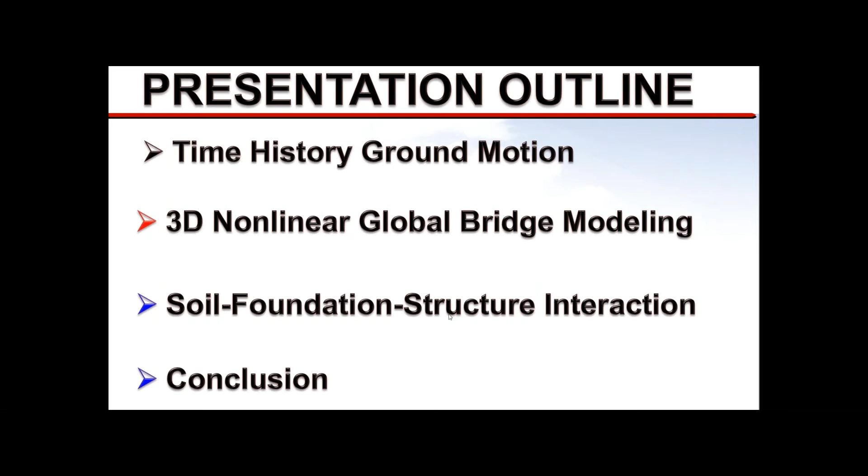So the outline of the presentation: time history ground motion, three-dimensional nonlinear global bridge modeling, soil foundation structure interaction, and then we come up with a conclusion. So what do you do when you have a typical structure versus a complex structure, and what do you need to do to develop the ground motions, and how many sets are required? Typically for complex structures, the community understands that we need about 11 sets of time history motions, and for standard structures, typically 7 sets of time history motions if required.

Keep that in mind. For typical standard ordinary bridges—2, 3, or 4 span bridges—we don't use time history, depending on the location and importance of the bridge. We use response spectra, but this presentation is all about time history and ground motion. Complex structures like Golden Gate, Vincent Thomas Bridge, and Samoa Bridge require time history analysis. Structures like MELOLAND (single 2-span, single column), Painter (2-span, 2 columns), and Brown Road Bridge typically use response spectrum, but we have recorded motion on these structures and want to examine what we learned and what we need to do for future structures.

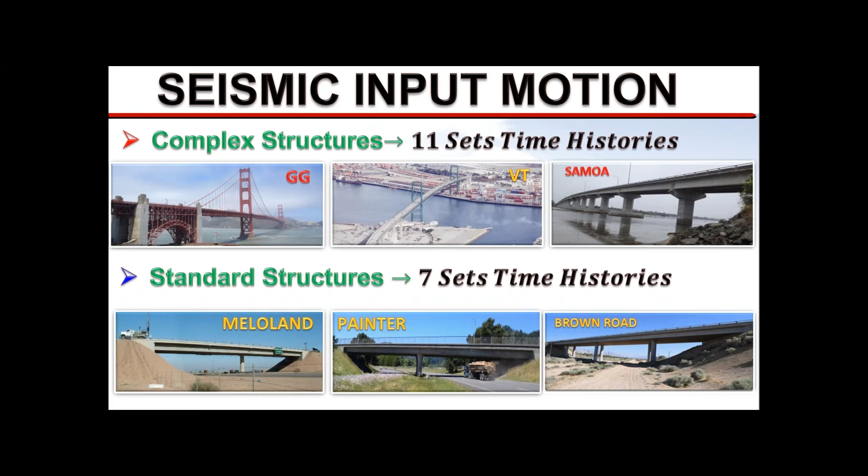So, ground motion parameters: as a structural engineer, you need to design structures that resist ground motion. You need to understand seismic source and attenuation relationship—not in detail, but understand the difference between shallow crustal earthquakes as far as seismic ground motion, intraplate earthquakes, and subduction zone earthquakes.

I don't expect structural engineers to be able to generate ground motion, but you need to understand the characteristics of these ground motions, because you're the one designing the structure and doing the analysis. It's important to see where the structure is located, because the ground motion you get from geotech, you want to understand if they delivered the right ground motion.

If you're in a subduction zone like Northern California, you don't want somebody to give you a ground motion from a shallow crustal earthquake. That's why it's important to understand the seismic source and what kind of attenuation relationship is used to develop this ground motion. If geotech gives you a ground motion whose attenuation is based on a shallow crustal earthquake for a structure in a subduction zone, as a structural engineer you need to ask why they're using the wrong relationship.

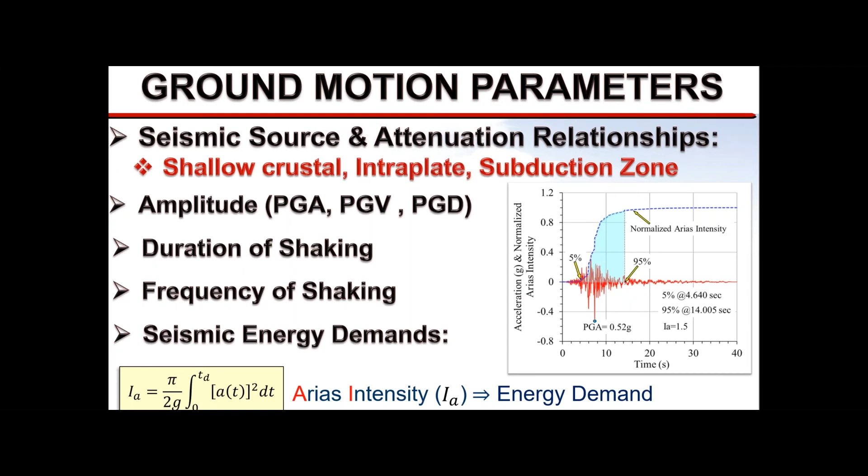Here is an example of a few ground motions. If I look at the Rinaldi motion from the 1994 Northridge earthquake, you get a PGA of 0.87. Duration of the motion is only 20 seconds, but it has a very high PGA. If you look at a motion from Northern California, the PGA is 0.51, the duration is 40 seconds, and it has a lot more cycles than the Rinaldi motion, even though Rinaldi has a big pulse—but the frequency content of the motion may not have as big an impact.

Look at the Saratoga motion, then look at the Chi Chi earthquake. PGA is only 0.37, but look at the velocity and displacement content and duration of that earthquake.

For Rinaldi, the PGV, peak ground velocity, is only 58. Saratoga is 16. Chi Chi is 103. If you look at displacement, Rinaldi is 16 inches, Saratoga is about 6.5 inches, and Chi Chi is almost 166 inches.

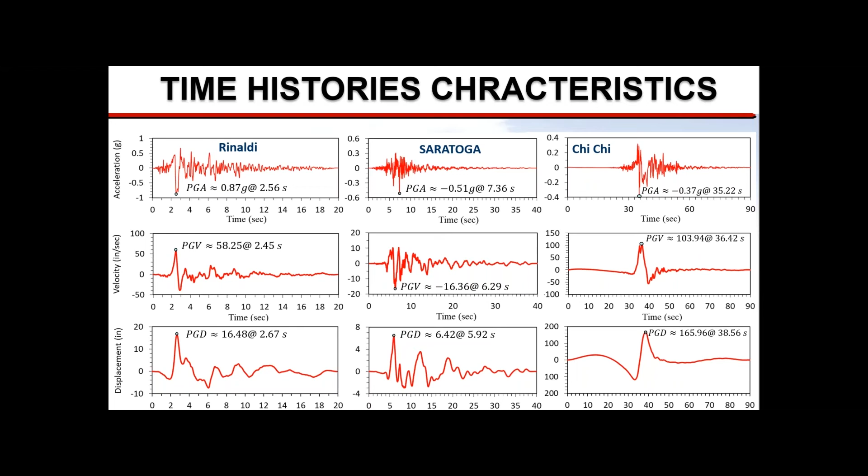When you do your modeling, you need to pay attention to the boundary condition of the bridge. For example, in this case we have restrainers supporting the bridge during the seismic event, and a rail sitting on top of the bridge. The bridge is supposed to support the rail, but it's also an important boundary condition on the bridge, so you need to consider all this when you develop your global model.

Another way, you may develop a detailed global model, but you want to make sure that your ground motions are correct.

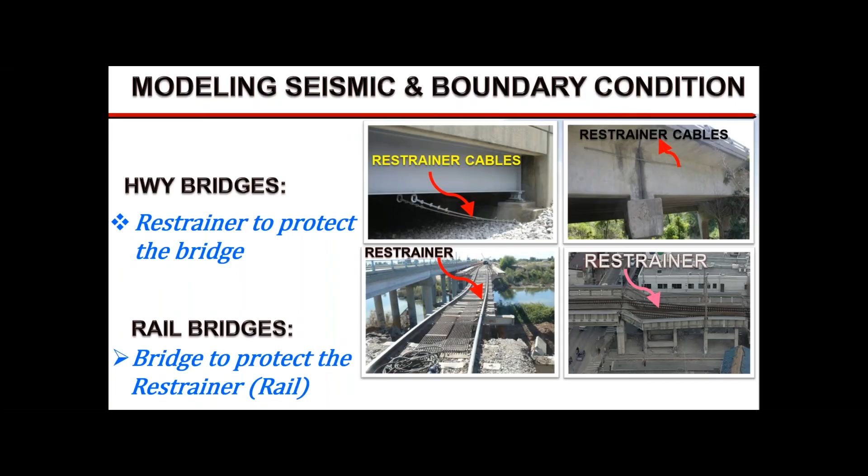When doing soil-structure interaction, that basically means a global system. You have an earthquake motion at the rock, you do your propagation, bring the motion to the foundation level, get a free field displacement, impose it on the foundation, and then get a response on the foundation. This response can be expressed in terms of velocity, shear, moment, and displacement as a function of time.

When you have, for example, 7 or 11 sets of motion, you have to look at all these time histories for all these responses and come up with some kind of average or make a judgment on how you should design the structure. The structure could be supporting either rail or just regular traffic, but the seismic analysis approach is still the same.

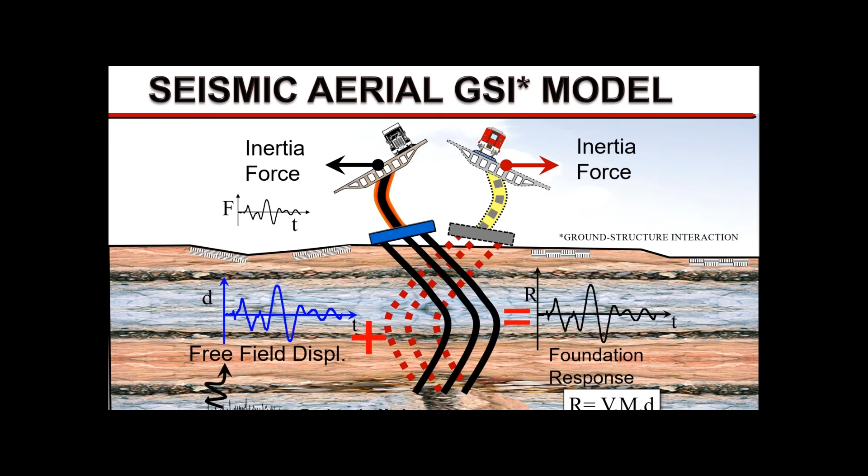This slide shows not only the global model for a typical highway, but also, if you have a rail on the structure, what is it that you need to do?

Basically, you need to develop your nonlinear soil springs, and depending on complexity of the structure, you come up with a ground motion, and then you need to consider what the rail on top of the structure is doing to the structure. Obviously, foundation springs and abutment springs are key.

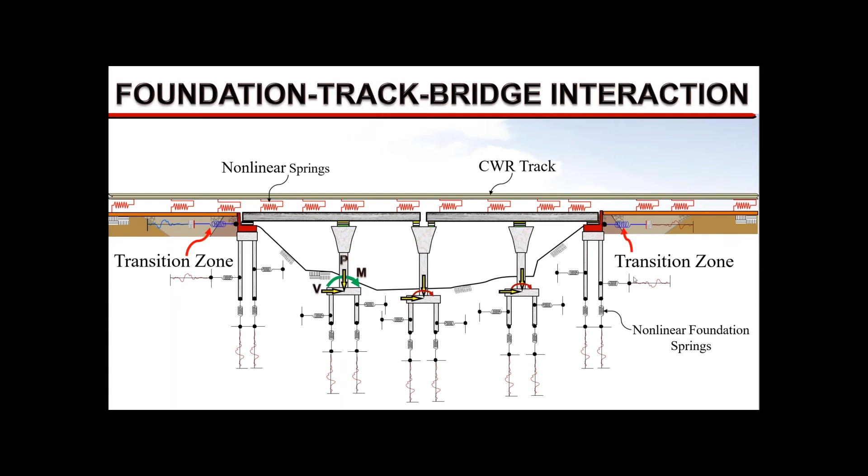We have a transition zone that will give you the nonlinear springs, and we've done testing showing how these nonlinear springs develop. They're very important in seismic analysis, especially if your bridge is not too long — the boundary condition from the abutment plays a significant role in the response of the bridge. And then, of course, there's the question of what kind of motion you'll be using, which we discussed earlier.

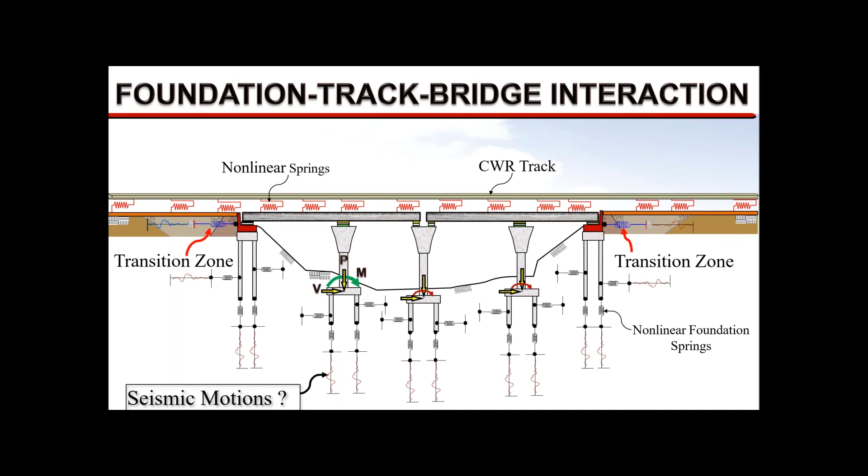We've done a lot of testing at various universities. We did a test in Utah, testing the transition zone for high-speed rail and also for high embankment. Here is the test setup.

With no backfill, this is the abutment. These are strain gauges to measure the pressure. This is the backfill with the compaction in place, and this is the system pushing the backfill.

This is a typical highway seat abutment, and you can see the back wall is designed to break during the seismic event as the actuator pushes into the abutment. This is looking at the abutment backfill after it's been pushed — you can see how the soil heaved, and we developed multiple cracks as a function of the push into the abutment.

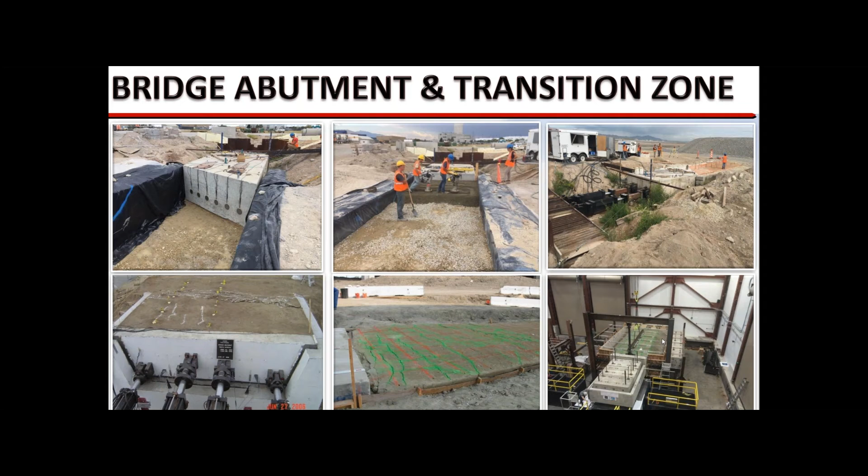These are all static tests using an actuator, but we've also done a dynamic test at the University of Nevada, Reno, with Dr. Saiidi — this is a dynamic test for the abutment. Here is the video of the test.

As a result of all this, we looked at all these tests and came up with abutment backbone curves and equations. I'm just showing the highway test for the highway backfill — this test was done at UCLA.

One was, and the rest of them were done at Brigham Young University in Utah. Once we plotted all the test data, we developed our hyperbolic model to come up with the equation to predict

the nonlinear backbone curve based on experimental data and also analytical model. So we have a good model for predicting this nonlinear backbone curve, which is extremely important in developing boundary conditions for the bridge. The test and analytical results show that if you have a nonlinear backbone curve for a zero skew, and you multiply that by a reduction factor R as a function of skew, it would basically be an exponential function

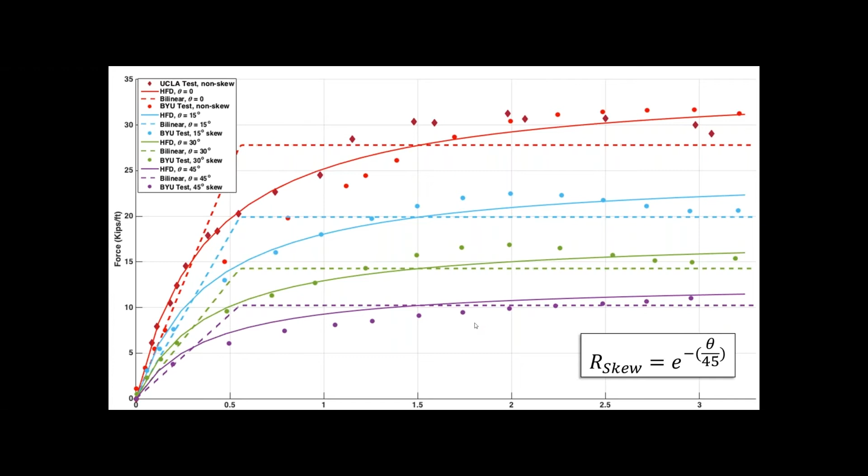We have published ASCE journal papers. If you're interested, just look at the abutment ASCE journal paper. You'll see my name and other co-authors, and you can look at the papers.

So, summary of the equation—very simple. Basically your force function, in terms of the hyperbolic model, has two constants, C and D, and they are easy to calculate. The values are given, and this is a simple equation for how we calculate the ultimate value, which is this point.

And you calculate the average stiffness, which we call K50—these are the equations. Very simple; you can do this in a spreadsheet in about 5 minutes. You can develop the nonlinear backbone curve based on these simple equations.

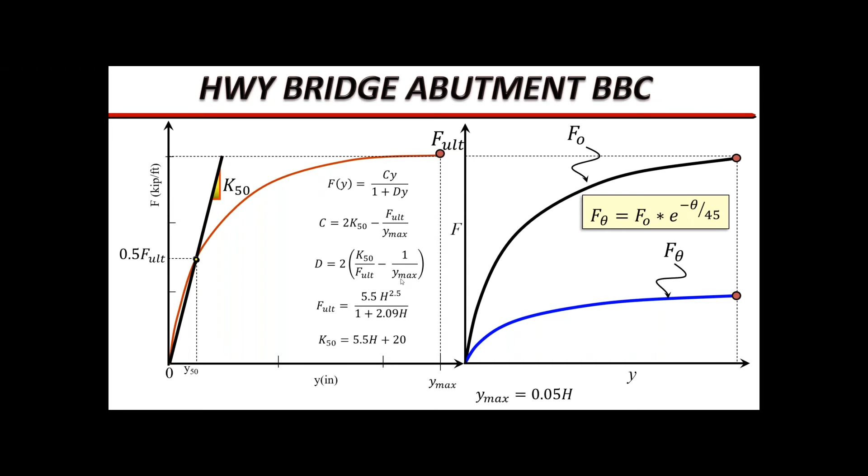This is just like the P-Y curves we have from LPILE and others—just another P-Y curve, but for the backwall. If you look at the new SDC, these are the equations in SDC 2.0.

They're based on all the tests we have done and the analytical model I've shown you. So the F-ultimate would be the simple equation, and if you multiply that by the R reduction factor, it gives you F-theta, the skew angle version. Very simple—there's no magic.

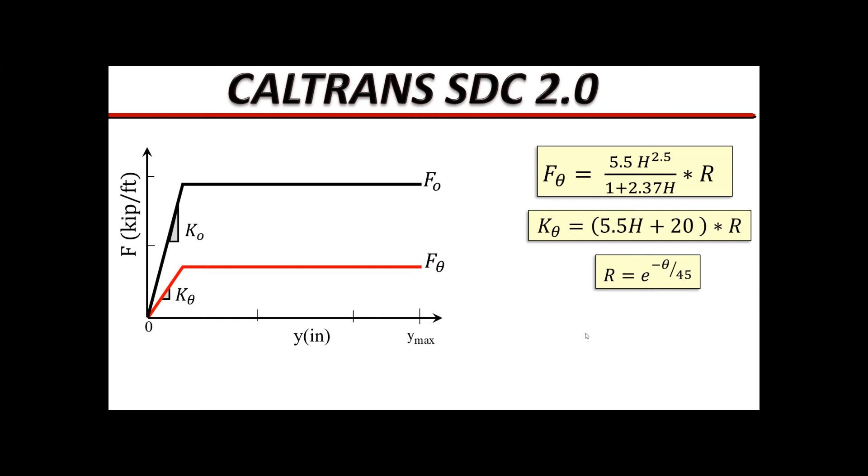So here is an example of the time history analysis with the rail sitting on top of the bridge, using time history. You can see the complete model—by the way, these are what we call direct models. There are two types of models when you do analysis: one is the substructure model, where you get rid of your foundation using a 6x6 stiffness matrix. These are old—we don't do that anymore. Almost everybody I know these days is interested in doing detailed seismic analysis using a direct model, meaning your foundation, pile cap, and everything, including the superstructure, should be included in your global model.

So you specify your nonlinear spring at the foundation, you impose the motion, and basically get your result.

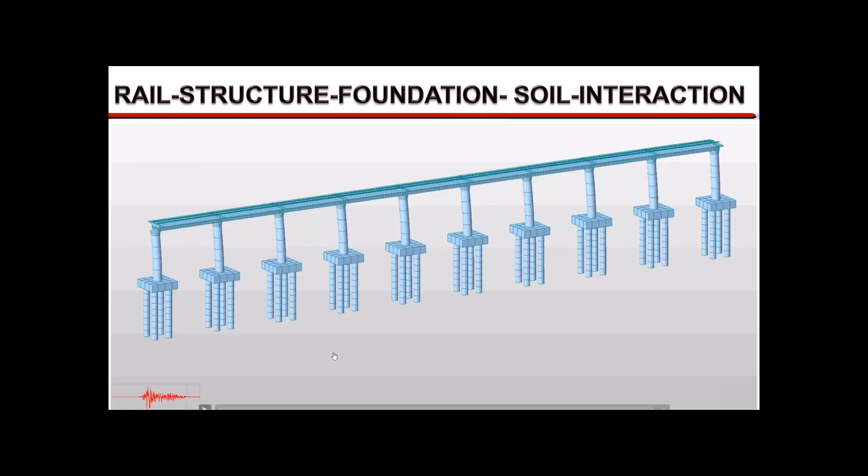So what do we do when you have a complex structure? Depending on what organization or criteria you look at, you can use either 11 or 7 sets of time histories. So what do you do if you have a fault rupture?

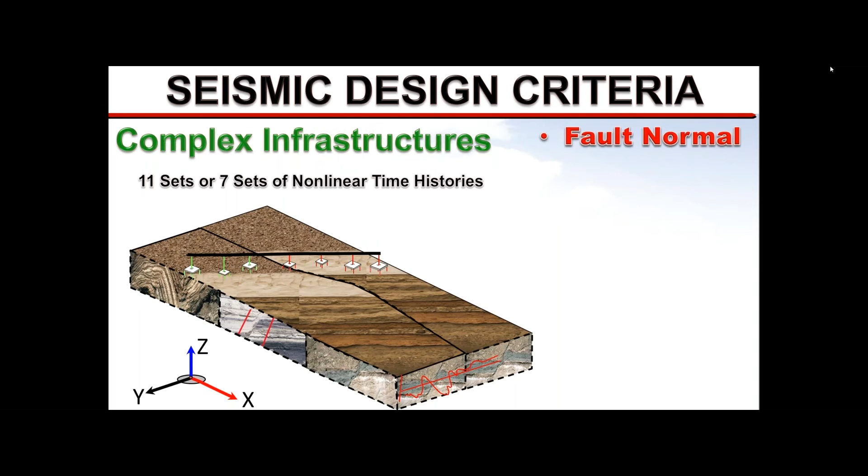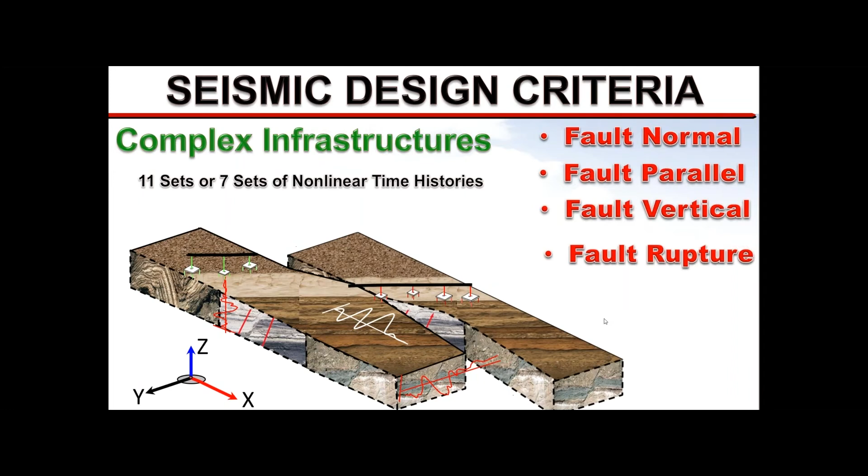Even if you don't have a fault rupture, you need to look at three-component motion: fault normal, which is this motion right here, fault parallel, and fault vertical motion. You also need to look at the fault rupture, and in particular, if you have a rail, it becomes very important that you look at fault rupture as well.

So when you do these time histories, you need to look at the uncertainty in the fault location, and also the fault rupture mitigation—what is it you need to do for mitigation? You can use isolation or other techniques, which we won't discuss here since this is mainly about time histories.

But if you have a fault rupture, what do you need to know? As you know, the rupture is not a single line, it's a zone you need to examine. So you want to make sure you place the fault at different locations along the structure and analyze it bent by bent to see what gives the worst scenario.

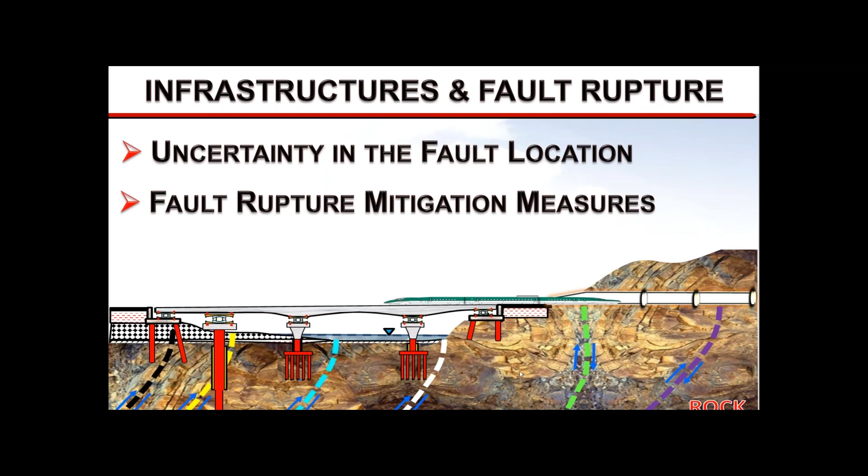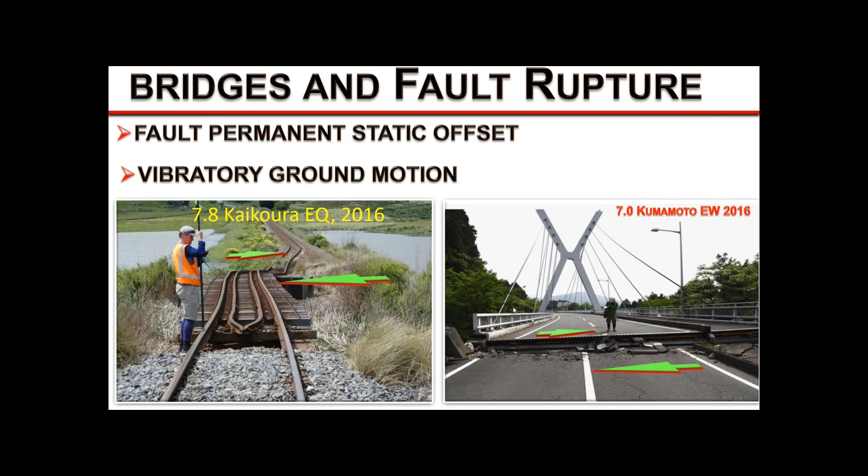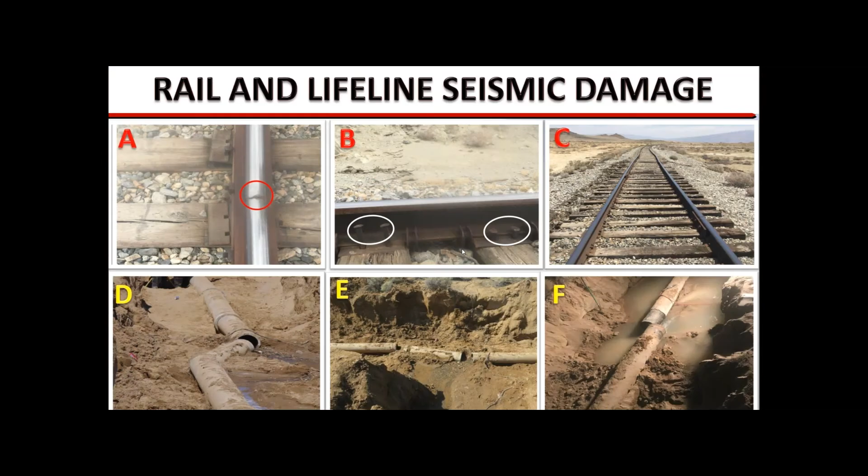There are other details, these are all from the Ridgecrest earthquake. You can see again what fault rupture has done to the rail. Spikes coming out, of course the movement, and also other underground structures, breaking pipelines, water lines, gas lines.

So when you look at fault rupture, or when you want to do earthquake analysis, if you have a fault rupture, you want to make sure that if the rupture is in the vicinity of your project, you need to look at the fault rupture issues too and impose fault rupture into your time history analysis.

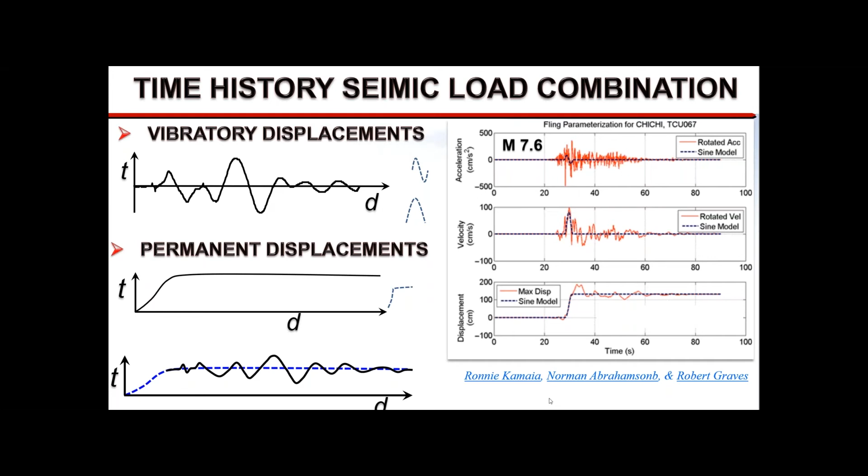This is the established procedure that has been used on various projects. I'm not going to name any particular project or any criteria for any particular project, but this has already been implemented in a couple of projects that I was involved with.

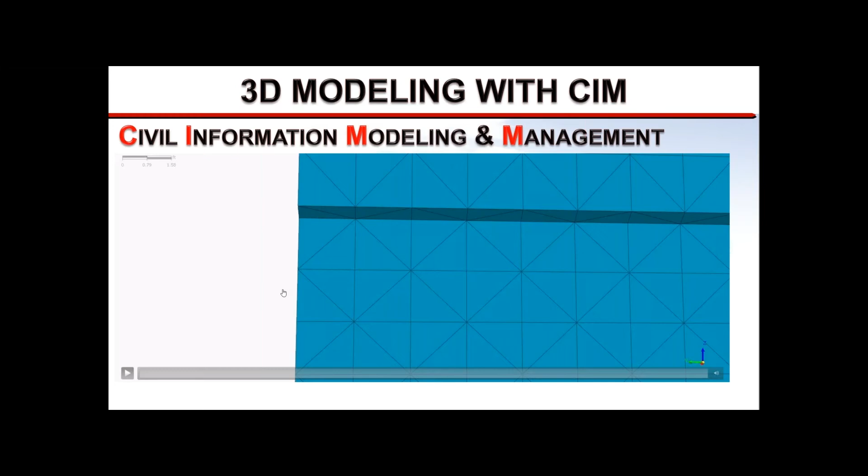But now developing a global model these days is not an issue. There are new techniques now with this computer age that we can develop very sophisticated computer models and look at things in detail. This is an example of what we call CIM, which is Civil Information Modeling and Management. This is done actually through MIDAS. It's an independent software, it doesn't depend on AutoCAD or MicroStation. It's a software that is developed by MIDAS.

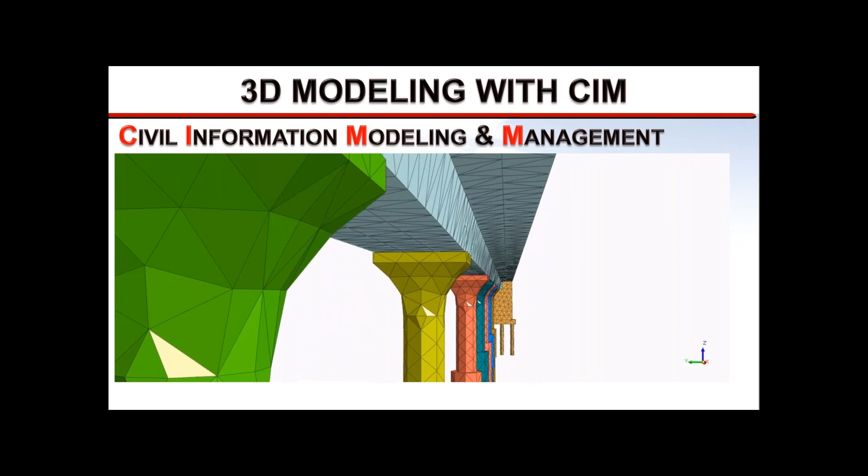And you can take a set of bridge plans, and with this set of bridge plans, you can develop your full 3D bridge model. And it could be even a continuum model, not really like a beam spring model, but a continuum model that shows also all the rails and everything, as you can see, on the bridge with isolation casing and so forth. So all of this can be included in your model.

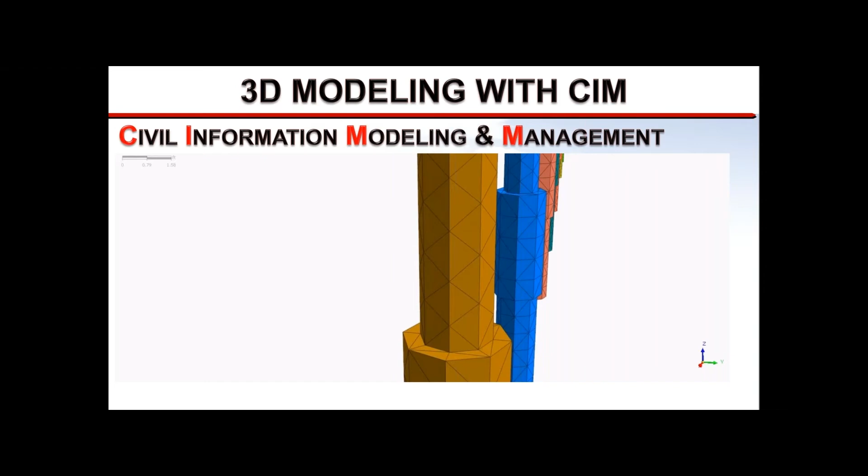And here is an example of that model. So with this model, I'm trying to show the fault rupture. I'm assuming they have a fault rupture located at this bent, in between this bent and this bent. You can see these are all supported on type 2 shaft with isolation casing, and this portion of the foundation is supported on pile group.

So the structure could be a combination, depending on the structure location. If it's running, for example, across the river, you may want to have a combination of shaft and pile group. In this case, this is a combination of shaft and pile group, and we want to see what happened to it as we impose the fault rupture.

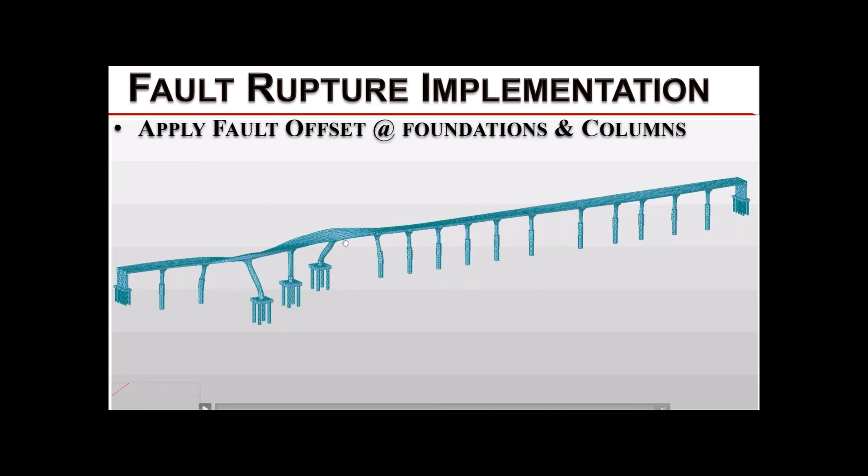So if I impose a fault rupture and vibratory ground motion, you can see I have a ramp function here with my history that is basically pushing into the bent in one direction and pulling in another direction. And that's what happened, and you can see how the superstructure is actually twisting. This is a closer shot. So I have the vibratory ground motion and a fault rupture imposed at this bent and this bent.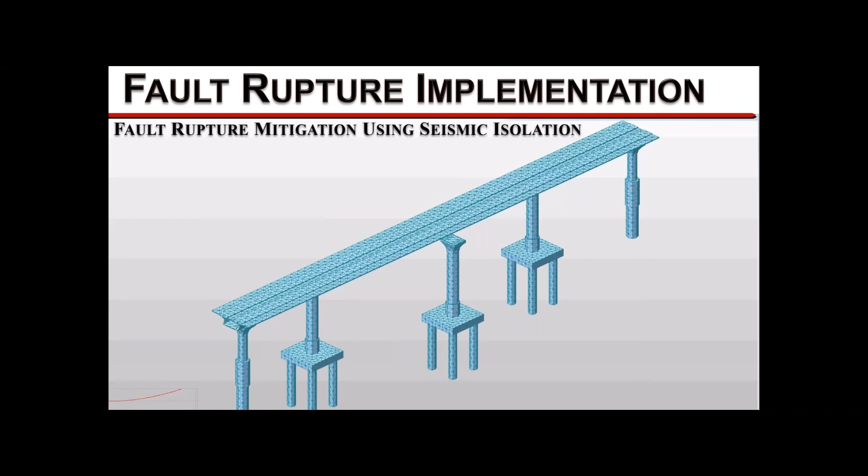So far I talked about general ground motion and what it is that you, as a structural engineer, need to consider. How do we know what we're saying or what we've done is correct, or that we can make sense out of it? So we looked at many instrumented bridges, including complex structures, just like I showed here.

This is a Caltrans bridge located in Northern California, the Eureka Samoa Bridge. The bridge is 2,065 feet long, 34 feet is the width of the bridge. It was constructed in 1968 and retrofitted in 2002. The recorded motion we will show you for the analysis is based on after the retrofit was completed.

So here, I'm going to start with the simple instrumented bridge and see how we were able to model this bridge and develop a response that matches the recorded motion.

Two bridges that we looked at are Meloland and Painter Street. These are the seismic instrumentation points. We have done extensive testing on the bridge, including the abutment test. We drilled behind the abutment in order to capture the properties of the abutment and see how we develop nonlinear backbone curves for the abutment, because abutments play a significant role on this type of structure.

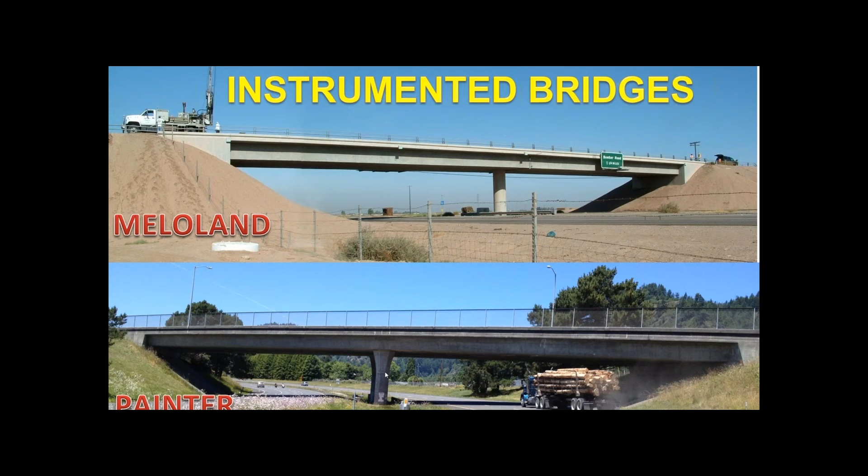We've done ambient vibration tests on these bridges. I'm just going to show you one of them, Meloland. Here is one of the ambient vibration tests, done by University of British Columbia, and I was there when they did it. Here is the recorded ambient vibration result, and here is a MIDAS model including all the foundations using a direct model. Here is another twisting ambient vibration, and here is a MIDAS model.

Before we started developing these time history models, we wanted to make sure our model is calibrated against this ambient vibration, so we get a good sense of the periodicity of these structures.

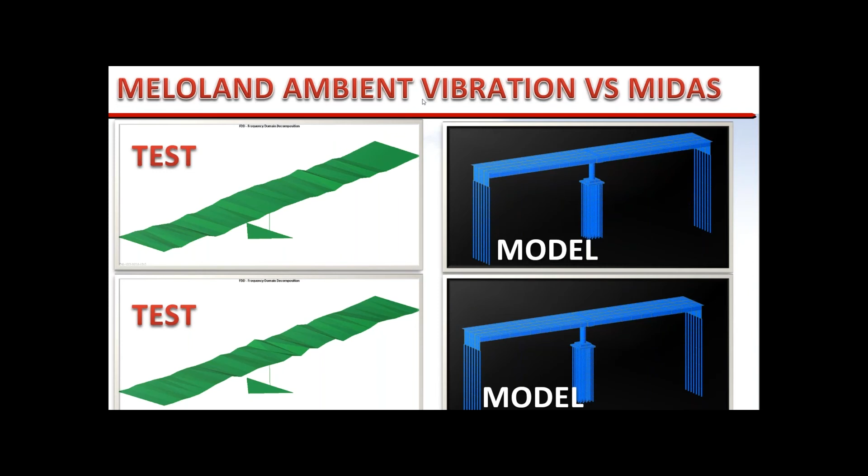If you look at Meloland, I'm just showing one of the instrumentation results here, basically channel 9, recorded versus calculated motion. They run on top of one another right here. Again, because we had a very good model of the abutments, we were able to capture the response of the bridge. Also, the pile cap springs played a significant role.

One thing about these pile caps: a lot of engineers ignore the contribution of the pile cap. Honestly, when looking at these instrumented bridges, including the Samoa Bridge, where the pile caps were sticking up above the mud line above the water surface, the mass of the pile cap was very important in matching the recorded data versus the calculated data.

For Meloland and Painter Street, not only the mass of the pile cap, but also the nonlinear spring attached to the pile cap were also very important in capturing the response of the bridge compared to the recorded data.

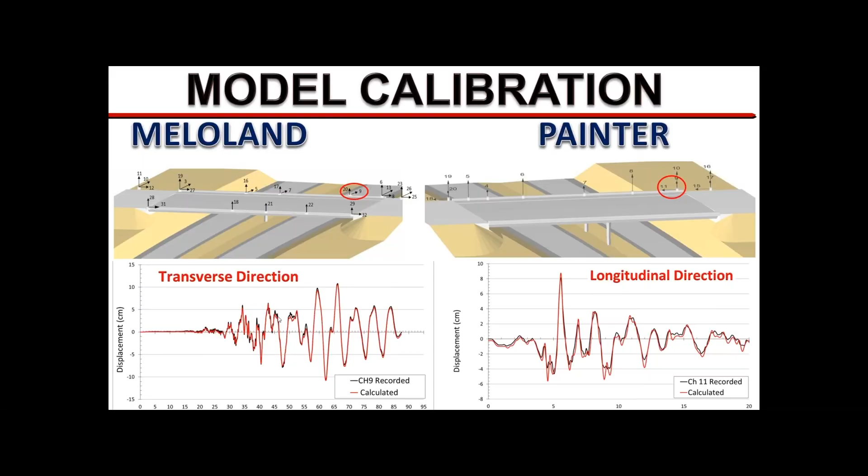So here is the Samoa Bridge. I'm looking at channel 10 and channel 8. Channel 8 is recorded at the bottom of the column, channel 10 at the top of the column, and we're looking at these in the transverse direction, which are key, very important in seismic analysis.

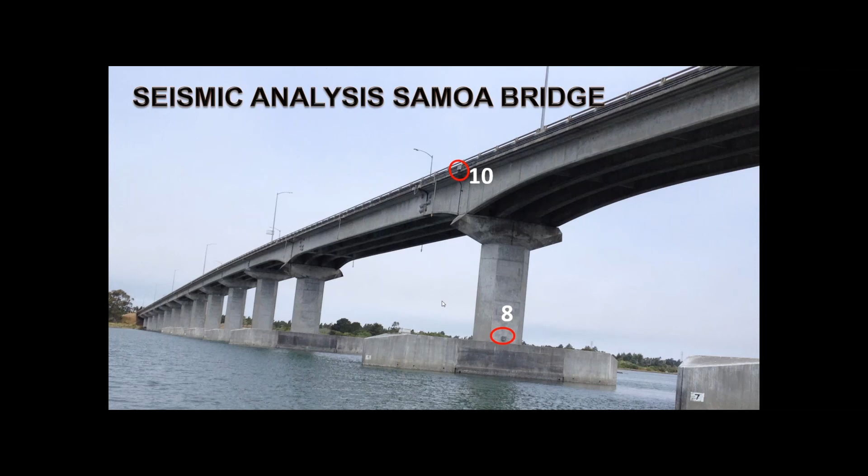Here is the detail of the model. So we impose nonlinear springs, and honestly I did not play with this nonlinear spring at all. I just looked at the soil profile. There isn't enough time for me to show the soil profile, but we just looked at it, developed nonlinear springs just like we do for typical bridges, attached them to the piles, and imposed nonlinear time history motions.

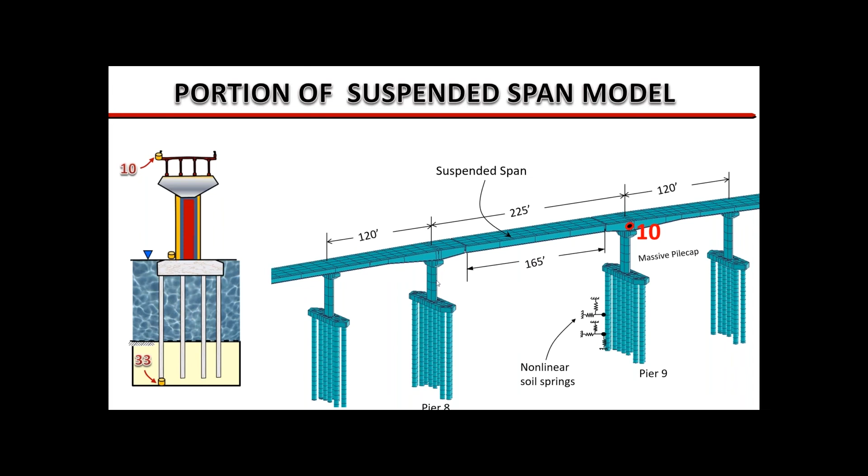The mass of the pile cap was very important in capturing this response, and also assigning cracked moment of inertia to the columns was also important.

Here is the response of the bridge. I'm just showing channel 10 in a transverse direction. This is the displacement time history, recorded versus calculated. If you look at two peaks, the period of peak to peak is about 1.48 seconds.

That matches the period of the structure in a transverse direction, shown here as the mode shape with a period of about 1.48 seconds, let's call it 1.5 seconds. That becomes important when looking at the Ridgecrest ground motion, as I'll show later, if we excite this bridge with the Ridgecrest earthquake, what would have happened rather than with the recorded motion from the site.

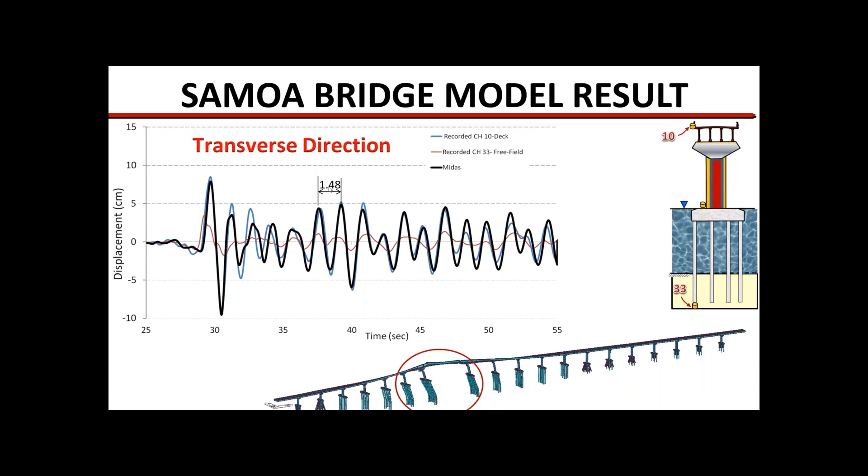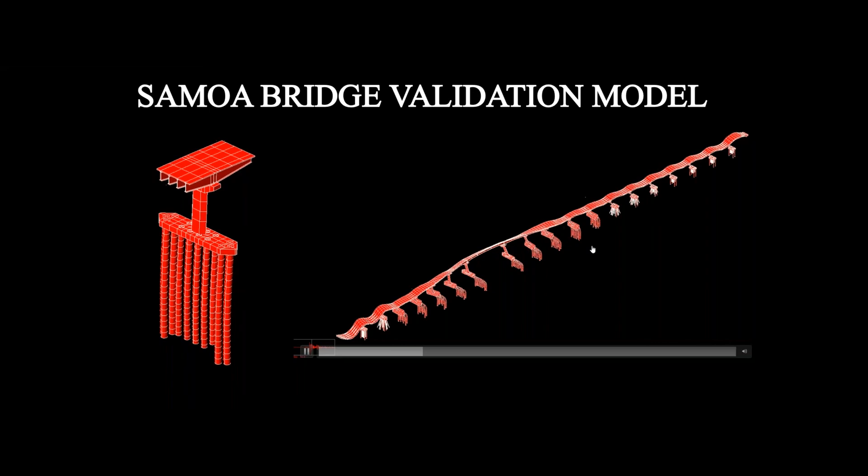So here is the animation of the bridge using the time history, and this one is just looking at one of the piers. This one.

So far we talked about bridge instrumentation and what we did to calibrate our recorded data versus our analytical model. We didn't use any continuum model. The models are not really sophisticated, just beam spring models, and I really think this beam spring model is the best to model bridges, because we know what to do, we understand them, and we've worked with this for many years. So my recommendation, based on my own experience, is that beam spring model is the best to go, with direct modeling.

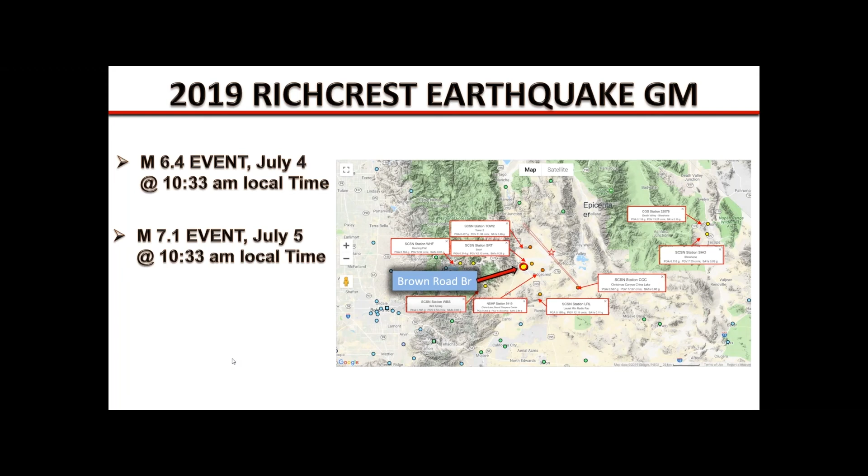I don't do substructure modeling, where you break the structure into superstructure and model the foundation separately. These days it's easy to do a direct model instead. Actually, I think it's a lot easier than doing a substructure model, because with substructure modeling you have to build the foundation model separately, analyze it, then come back and check if it works. With the direct model, your foundation is already included. If you need to do a pushover analysis or whatever else, you already have everything in your model, you just separate it and go.

So let's talk about what we learned from the Ridgecrest earthquake, and what we need to do based on that in regard to ground motions.

Here is an instrumented bridge, showing the instrumentation. We looked at instrument number 7 and number 4 in the transverse direction. The bridge is located about 14 miles west of the main rupture, magnitude 7.1. There were two earthquakes, magnitude 6.4 and 7.1, but we're only looking at the magnitude 7.1.

In particular, I looked at this recorded motion on Brown Road Bridge, and also imposed another motion with very high directivity, located at the end of the fault, to see what would have happened to the bridge if it had been located there with high directivity, rather than 14 miles west of the fault.

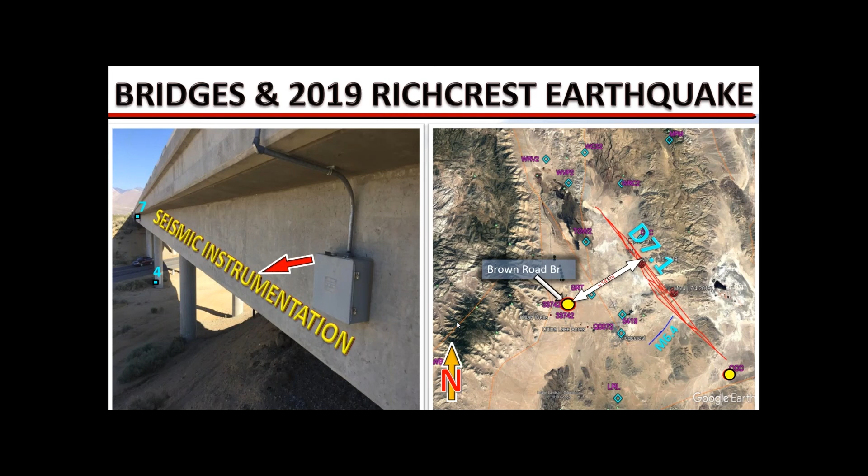So here is a little more detail of the bridge. In order to understand its behavior, we wanted to look at some details. Channel 7 and channel 4 are located at bent number 3. Bent number 3 is fixed to the pile foundation, while bent number 2 and bent number 4 are pinned. As I'll show you later, you can see this bridge.

If I had looked at this bridge before—this is just my personal opinion, not saying what should have been done—but if I'd looked at it as part of a screening, I would have thought it should have been retrofitted. But interestingly, nothing happened to the bridge during this magnitude 7.1 earthquake. Nothing happened. Why? We'll look at it. It also has a 45 degree skew.

And it was constructed in 1966. At that time, I'm not even sure if seismic loading was considered or not. I'm not sure.

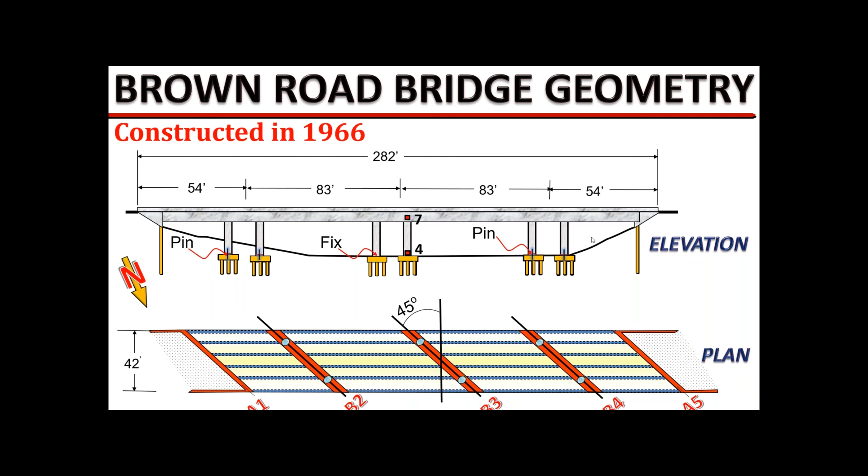Here is more detail of the bridge. 42 feet is the width. As I said, bent number 3 is fixed to the pile cap and foundation—this is just a schematic. Bent number 2 and 4 are pin connections. You can see the detail for the columns, number 11 bars, total of 24, but only number 4 spiral with 12 inch pitch, so I would have thought this should probably have been retrofitted.

Also, here is the detail of the foundation piles, 18-inch diameter foundation piles, number 6 bars, total of 4, again with minimal confinement.

Here is the detail of the pile, column sitting on the pile cap. Pin connection with 4 number 11 dowels extending from the pile cap into the column.

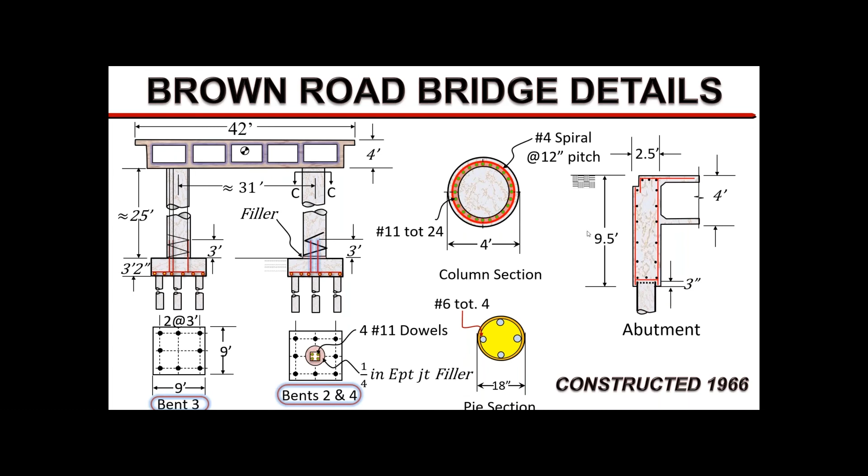Abutment, very important. It's a monolithic abutment. 9.5 feet is the height of the abutment. Therefore, you will get a lot of capacity, a lot of resistance from the passive pressure from this abutment. That's why we've done a lot of testing to make sure we understand the behavior of all these abutments.

So here is recorded motion, free field, channel 4, and channel 7. Free field means somewhere located in the ground, a motion which has nothing to do with the structure. Then we have recorded motion at the top of the pile cap, or bottom of the column, and recorded motion at the top of the bridge.

My God, they're all on top of one another. That's why when the team of CALTRANS earthquake engineering looked at the bridge, nothing happened to the bridge. Why? With this...

7.1 magnitude earthquake. If you look at the initial part of the time history, maybe 15 to about 25 seconds, you can see something happening - the red is for bridge deck response. You can see something happening at the early stage of the earthquake. These are very high frequency motions.

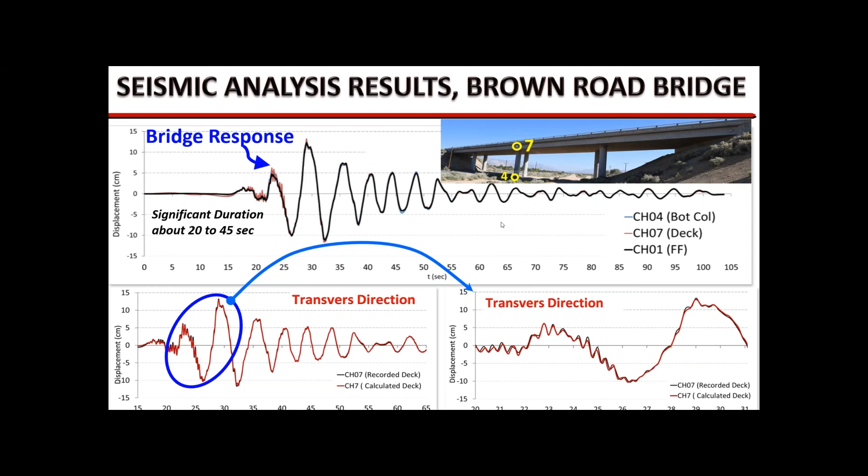That's what happened. So when I looked at this, I decided, well, why don't we shake this with a different motion and see what happens. What if I shake this bridge with the motion right here? This is one of the strongest motions, with very high directivity and large pulse.

So when we look at this motion, actually this matches the recorded motion - the calculated motion versus the input motion are exactly the same. Very, very minor differences, but almost identical, again because this is a very high period motion. Therefore, it's not doing anything to them.

So that's what I'm trying to say. You need to understand what motion is given to you by geotechnical engineers or engineering seismologists. You need to communicate with them and make sure they understand some portion of the structure behavior, or you want to make sure you understand what excites your structure.

So in this case, honestly, if I wanted to design a bridge in this zone, and I didn't have this ground motion, I would say I want to use this motion to design my bridge. But this motion is not doing anything to a particular bridge I may want to design. If I'm designing short span, typical standard ordinary bridges, this motion isn't doing anything to the bridge - unless you use some kind of response spectra from this motion and come up with a smooth response spectra, designing using response spectra, not time history analysis.

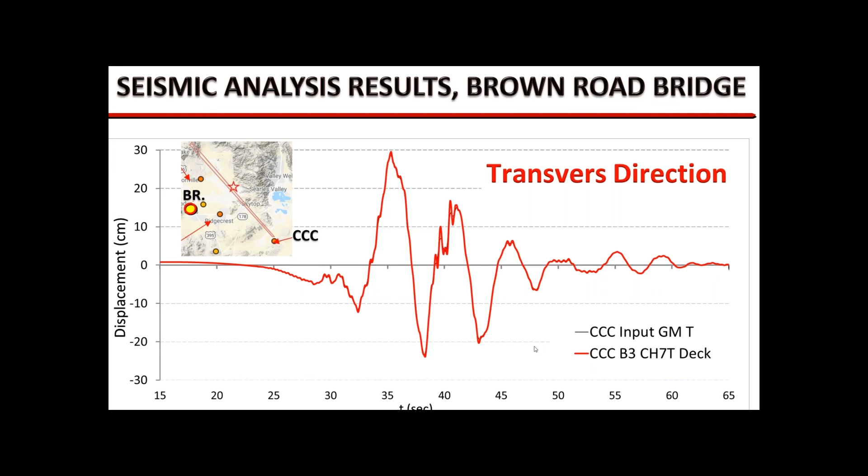Then I thought maybe it is a characteristic of these types of bridges with monolithic abutments, and maybe because of their configuration - having a deep abutment back wall with participation of soil capacity - maybe that's what is happening to these structures and they're not moving.

Well, I had a calibrated model from Painter Street. So I had a motion from Painter Street, the 1992 Cape Mendocino earthquake with magnitude 6.9, which was even less than magnitude 7.1.

So I decided I'm going to shake this structure with this motion and see what happened - if I had used a different motion, what would have happened to this structure here? Also, please notice that bent number 4 and bent number 2 are pin connections - column to pile cap are pin connected - but bent number 3 is fixed. I'm going to show an animation to see how the pile cap or foundation is behaving with respect to this fixity, which is also very important for structural engineers to know, because of foundation capacity protection.

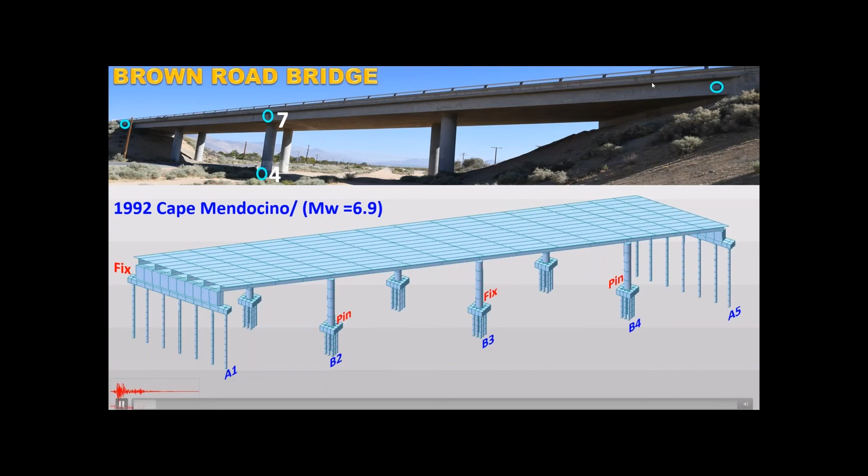So now, this was shaken with the Cape Mendocino earthquake, and this is what I'm going to show you - this is the result. You can see the input motion is the black line, and the red is the output. I know the model is good because we were able to match recorded data for the Rio Dell earthquake, and we really paid a lot of attention developing this model in detail. Basically two different models were developed, completely independent, and we both came with almost identical results or conclusions.

But then I extended the model and developed this model for various ground motions to understand what is happening in these ground motions. It was actually after the Rio Dell earthquake that I noticed, as a structural engineer, you really have to pay attention to the type of motion that you're getting, understand the motions, and whether these motions are applicable to your particular structure that you're trying to analyze.

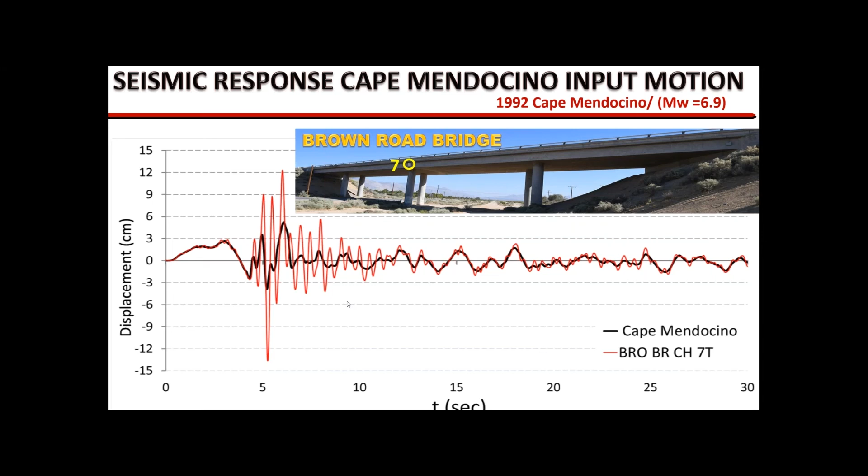We also decided to shake this other structure with the Brown Road Bridge motion, with the Rio Dell motion, and see what happened to other bridges. What would happen if this earthquake had the same motion characteristics but happened somewhere else, or other bridges are located in a zone which was not similar to the Brown Road Bridge ground motion, shown with the black line.

And this is the response of the Samoa bridge using the recorded Brown Road Bridge motions. And you can see actually the bridge - you can see the difference between the input motion and the response of the bridge.

So again, what I'm trying to say is you really need to pay attention to the characteristic of the motion and the characteristic of your structure. Just don't take any motion you get from geotech or engineering seismologists - you need to tell them about the characteristics of your bridge. Tell them what kind of fundamental period your bridge has. Talk a little bit about the stiffness of the bridge, span length, so they would give you a proper motion that fits your needs.

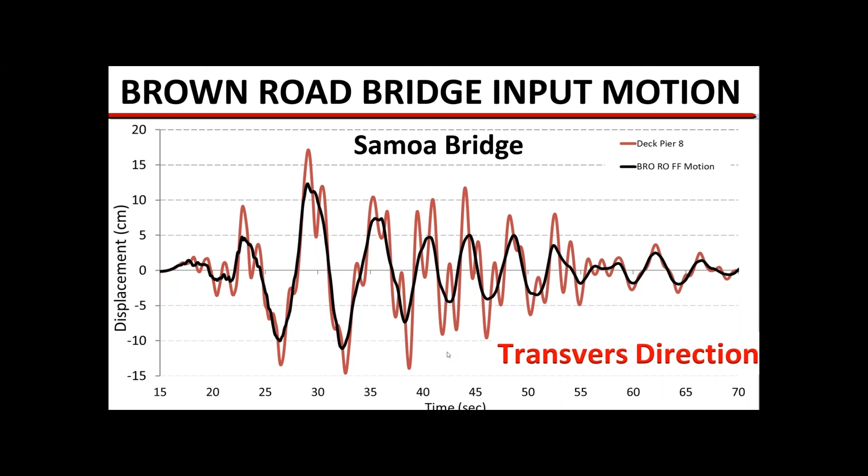We also decided to shake some very long period structures with the Brown Road Bridge or the Rio Dell earthquake and see what would have happened. Let's say you have a bridge located in LA and you get an earthquake similar to Rio Dell, or you have a bridge similar to this in the vicinity of the Rio Dell area - what would have happened to this bridge?

You can see the black line again is the input motion from the Rio Dell earthquake. The green line is the response at point A, which is at the deck level, and then of course the red line is the response at the top of the tower at point B. This is basically the animation, again using MIDAS. It's a direct model.

Nonlinear soil springs are attached to the foundation. Now you don't see the foundation moving because I'm using acceleration response, acceleration time history, which is relative - that's why the foundation is not moving. But if I had used displacement, you would also have seen in the animation that the foundations are moving as well.

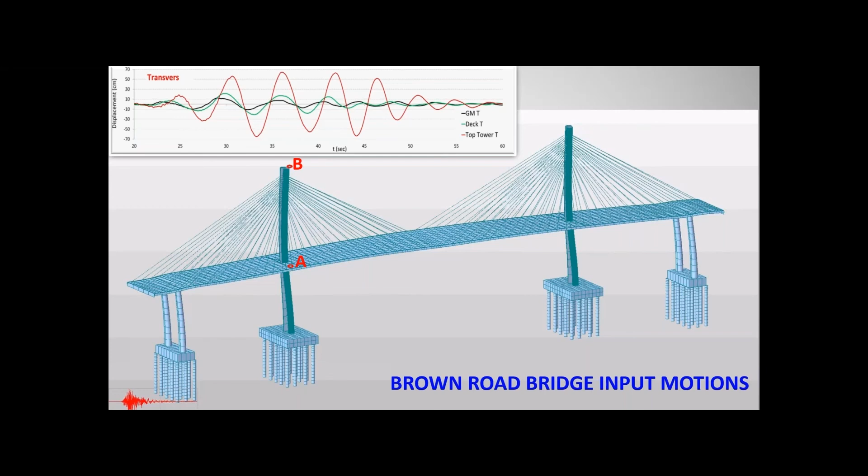So this is kind of the conclusion of my presentation.

I'm showing this to show the difference between the various structures excited with different time history motions. We have representations of the Golden Gate, Vincent Thomas Bridge, Samoa Bridge, MELOLAND, Painter, and Brown Road Bridge, and SRC. We excite all these structures with a 2019 Ridgecrest earthquake and also with the Chi-Chi earthquake to see the difference. These motions are very long period motions, so we'll see what happens to long period structures compared to short period structures, like MELOLAND or Brown Road Bridge. That's what you're going to see.

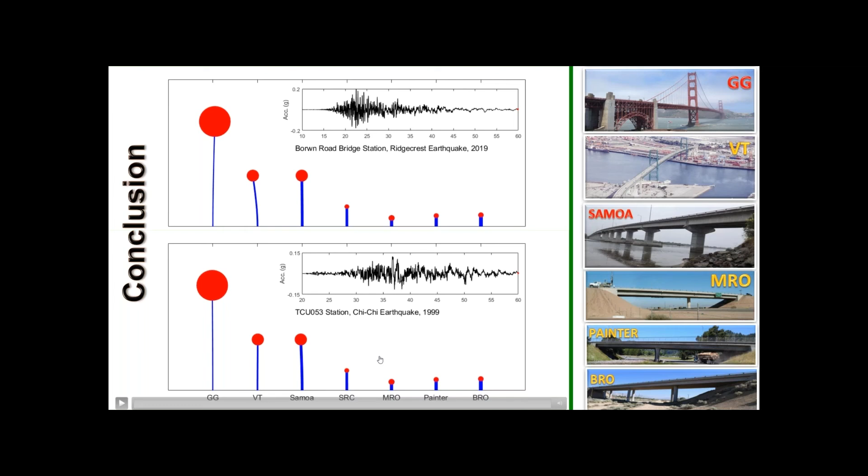For long period structure motion, you can see movement on these standard ordinary bridges which are stiff. This long period motion isn't really doing too much. That's actually the representation of Vincent Thomas Bridge - it moves a lot because its period is about almost 5 seconds. This is Samoa, with a period of about 1.5 seconds. And of course these standard ordinary bridges have a period of less than 1 second, basically almost less than 0.5 seconds, so you can see they don't move as much.

But now if you use motions with very high frequency, you're going to see what happens to the structure with low period, high frequency compared to the structure with high period. You can see how these small structures are getting really excited here.

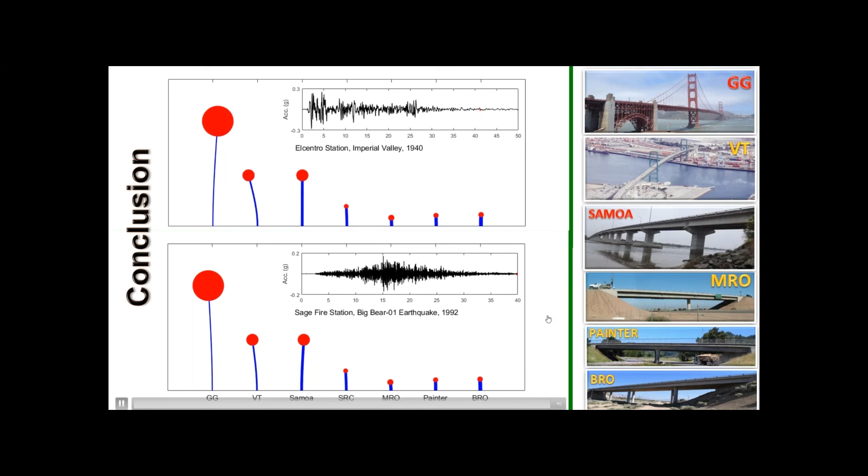Okay, and that's the end of the presentation.

I'm going to show you a video of the Ridgecrest earthquake. Scientists and seismologists are all very involved with developing ground motion - NGA West 2, NGA West, NGA East. That's actually in Ridgecrest, just before the magnitude 7.1 earthquake. That's in the hotel. I got this video from Professor Bozorgnia from UCLA.

Interesting how you can see the cars moving with their own frequency in different directions, and trees moving in the background. That's a real simulation of the earthquake. I wish there was a bridge structure here that we could see, but that's all we have. So that's all I have - I'll be happy to answer any questions.

I didn't want to get into too much detail. I didn't know if you wanted me to open a bridge model to show how we did this, but I'm assuming whoever is watching this video or this presentation already has a lot of modeling experience. I'm not doing anything magical - just attaching nonlinear springs to the foundation, using the beam spring model to develop the bridge models, except for the one I showed for the fault rupture.